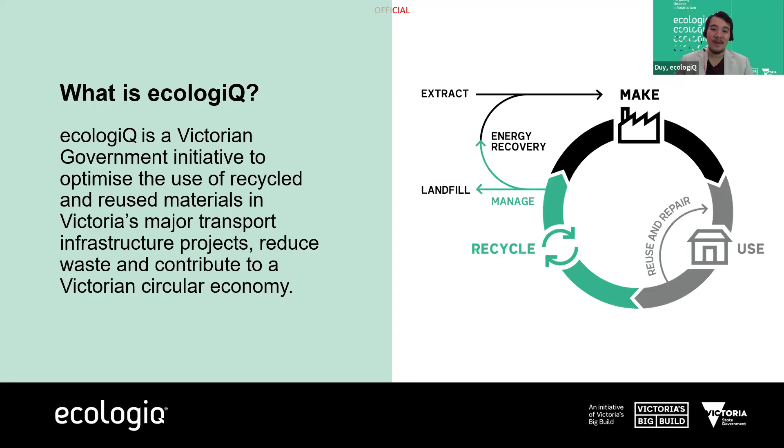So there's a way that we can recover those resources, keep them in operation, avoid using them in the first place. I think we know that that's the best way we can go forward in terms of some of the challenges we have ahead of us, from resource constraints right through to climate change and carbon. And you know what? We call it a circular economy, but I think our First Nations people just called it caring for country, and they've done so very well for so many thousands of years, that's why I always enjoy talking about this, as well as doing the acknowledgements to country.

But just a little recap, ecologiQ has been delivering the Recycled First policy, which means that a lot of our road, rail, and tunneling projects have had to look at the use of recycled materials wherever possible, then optimize in terms of: it needs to make sense, it needs to perform, it needs to be safe, and it needs to be available and economic. And secondly, they've been reporting on the quantity and volumes of those materials used to date on their projects.

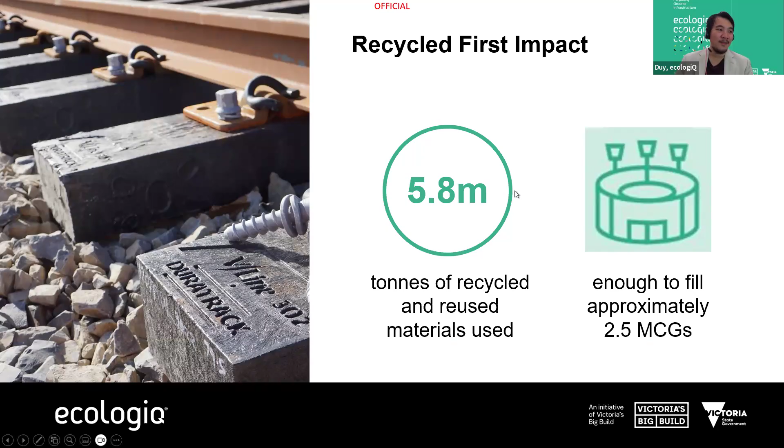So here in Victoria, I just got an update yesterday from our data team that we've now hit almost 6 million tonnes of recycled and reused materials on our road, rail, and tunnelling projects. And for the other Melbourne metric, it's enough to fill over 2.5 MCGs. So quite a bit of that material diverted from landfill.

Now, helping me to provide some advice and guidance to our presenters for today's showcase, we've assembled a couple of experts from industry, and that's who form our panel. I've had an apology from one of our panelists, but that's okay. We still have Nicholas Lee and Leanne Griffin here to help us. Leanne, I can see you there. Did you want to say hello to the audience and introduce yourself and what you do, and maybe any thoughts for today?

Yeah, sure. Hi, everyone. I'm very pleased to be here today. I am the circular economy lead for Arup in the Australasia region. And I've also been a long-standing team member and supporter of ecologiQ. I used to be with the program back when the Recycled First policy was first rolling out, and I've been involved on and off over the years as well. So really looking forward to hearing all of the great ideas today.

Thanks, Leanne. Nicholas, representing Department of Transport. Morning, all. So I'm manager materials assurance. The team looks after material registration schemes, mainly in the road space. So looking after the asphalt, concrete, crushed rock mix designs. The team also does accreditations for quarries. And as part of that, we also look at novel or different materials when they come out and make assessments on those. Fantastic. Thank you, Nicholas, and always great to have the Department of Transport's input.

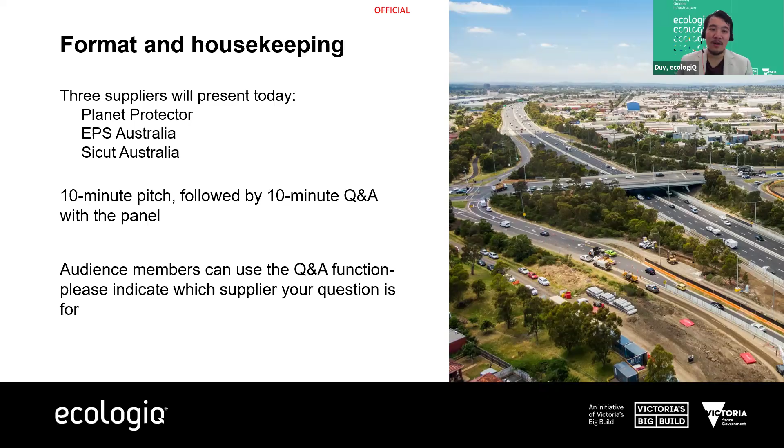So without further delay, Lars, the floor is yours. Please tell us about Planet Protector. Perfect. Thank you very much. Now, good morning, everyone. My name is Lars Ljung. I'm the Sustainability Manager here at Planet Protector, and I'm here to talk to you about one of our new products called JEANIUS.

Now, Planet Protector started off as a packaging company that basically harnessed the power of sheep's wool to make insulated packaging. That's why I have a sheep sitting behind me, because that's always been our mascot. That's always been our mission to make sustainable products using sheep wool. So we started off as a packaging company. We did very, very well, supplying mainly to the food and pharmaceutical industry, providing insulated packaging.

But of course, as we grew as a business, and as we grew in knowledge, we also wanted to expand into new sectors. Using the same knowledge about insulating a box, we figured that we might as well also be able to insulate buildings, acoustic insulation, in between partitions, and so on and so forth. And as such, our new product was born. So we're moving a little bit away from wool, into a new product that has been aptly named JEANIUS. Can we go to the next slide, please?

I do want to, of course, do a bit of an acknowledgement of country. Now, I am sitting in Gadigal land of the Eora Nation, but one of our big facilities is amongst the Bunurong people of the Kulin Nation, down there in Melbourne. So I want to acknowledge both lands because we benefit from both parts of Australia. Next slide, please.

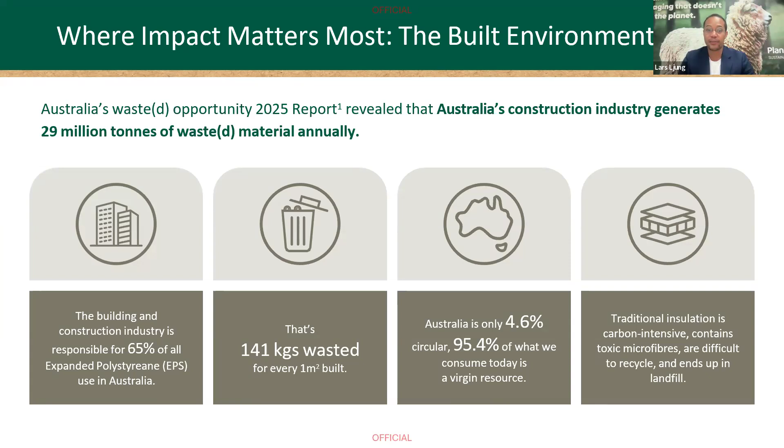Introducing our bit of a solution. Last year, we completed the construction of a $15 million state-of-the-art fiber processing facility. What this allows us to do is take a variety of different fibers, upcycle them, and create different products such as building insulation, acoustic insulation, and of course, packaging for the other side of the business. In addition to that, we also do a lot of geotextiles and bedding, which speaks to the capability and the breadth of what our machine can do.

We have aptly named the machine our Oompa Loompa from Charlie and the Chocolate Factory, because as you can see, there's a huge connection of piping systems going through the entire facility. But basically what we have built in Australia is the Southern Hemisphere's most advanced fiber processing facility. And like I said before, it allows us to take a variety of fibers and make them into insulation that can be used for building, for acoustic paneling, soffits, and so on and so forth.

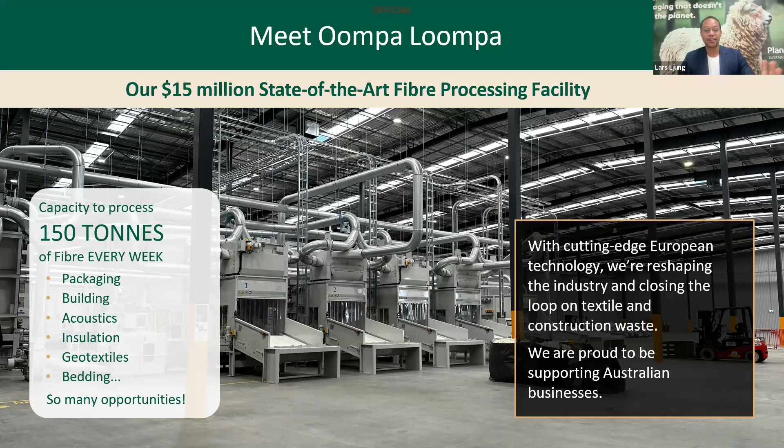And we're very, very proud to have been able to bring this technology back into Australia, supporting local businesses in many, many different ways. So can we please go to the next slide, please? And introducing, of course, our new product. And as the name would probably signify, Jean is for genius.

So we've, of course, taken recycled cotton. We have been able to upcycle it using our machine and create a new insulation product that's the first of its kind in Australia, made again from 100% recycled denim jeans. This has been done in Europe quite extensively, especially in Germany and France, but this hasn't been brought down here. So basically what we had to do over the last year and a half is, of course, set up the machinery, which took a lot of time.

In addition to that, of course, we had to get all the compliance, which we have done. Of course, we have Group 1 fire rating. We've done our noise reduction coefficient ratings as well. And of course, R values, where we hit anything from R value 2 all the way to R value 6. So basically spanning all the different types of buildings that we need.

In addition to that, it is a non-toxic alternative to what we already have on the market because it doesn't have any VOCs. But more importantly, you can handle it without any issues because, at the end of the day, this is only a recycled denim or cotton. So installing it, you don't need any special PPE or equipment. And as you can see from the image on the side there, it installs very, very easily without any sort of issues. But more importantly, we can also speak about the sustainability of it.

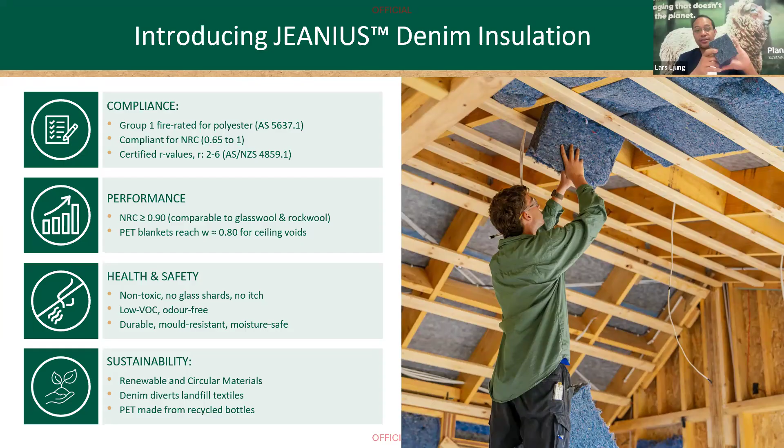Because we're using a resource that would basically be ending up in landfill, we are saving a lot of carbon emissions from being wasted, but also we are diverting this particular waste away from the landfill and using it in our product. Now, I do want to preface by saying we do have a small percentage of recycled PET, which we use as a binder, but only about 5 to 10%. The rest of it is just cotton or denim jeans. Can we please go to the next slide?

In addition to that, denim has one of the best noise reduction coefficients that we have on the market. From our testing, we understand that our product is probably the highest with an NRC rating of 1 at 90 millimeters thick. This is why denim is used extensively in the automotive industry, such as in your Mercedes-Benz and your Volkswagen, as the acoustic insulator to reduce road noise.

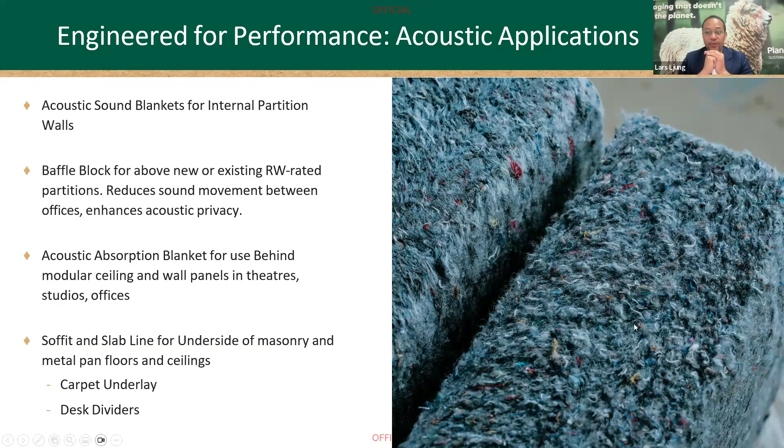As such, we want to harness this particular technology, and we are basically making products that are incredible acoustic insulators that can be used as partitions in offices, as baffle blocks, as soffit liners underneath parking lots and driveways as such. But again, it's just harnessing that particular technology that reduces the noise so much more efficiently than anything else in the market to create a new product that we haven't really seen before. So we could go to the next one, please.

The main benefits, of course, to any of the businesses that will be working here is that we'll be heading towards more of a net zero aligned product by using our denim insulation. We have a completely ethical and transparent supply chain that we're always happy to share. And we're also in the process of doing a complete LCA so we can realize how low our carbon footprint is when you compare it to your fiberglass insulation or your mineral wool.

In addition to that, our manufacturing facility is in Altona North, so it's 100% onshore, which reduces lead times, but also gives us a lot better opportunity for product research and development with any of our partners. In addition to that, we have incredibly competitive pricing, and that is based on the fact that we have a highly automated line that basically produces a large amount with very little labor. As such, we know that we're very competitive even with imported products that people might see as a more cost competitive option to us.

In addition, we are ISO certified, and of course, we are a woman-owned business and B Corp certified too. Next slide, please. What we foresee basically in the future is that much more of the infrastructure is going to be demanding low carbon and circular solutions.

Australia-made policies are also going to be on the forefront of a lot of decision making, while circular economy initiatives and local manufacturing will be something that we're going to see a lot more of. As such, we're very, very proud of what we've built here with local manufacturing using circular products that puts the health of ourselves and our buildings first.

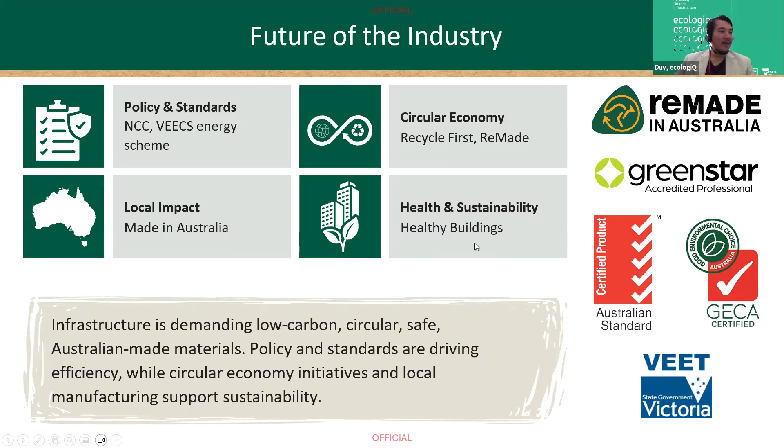And for our next presenter, something a little bit different, Dean from EPS Australia. Dean, I hope you're not dialing from the Lady Gaga concert or the Grand Prix? Yeah, it's all happening at the moment for us.

Hi all, my name's Dean Andreula, Managing Director of EPS Australia New Zealand. Just a little bit about our company. We're a leading infrastructure supplier for ground protection, seating and stage barrier crowd control around the world. We're based out of 14 countries. And we're just looking at our footprint and looking at how we can make the world a better place with going green.

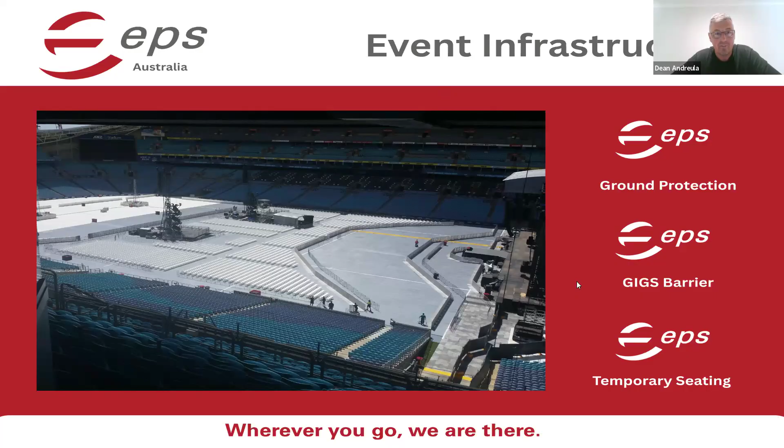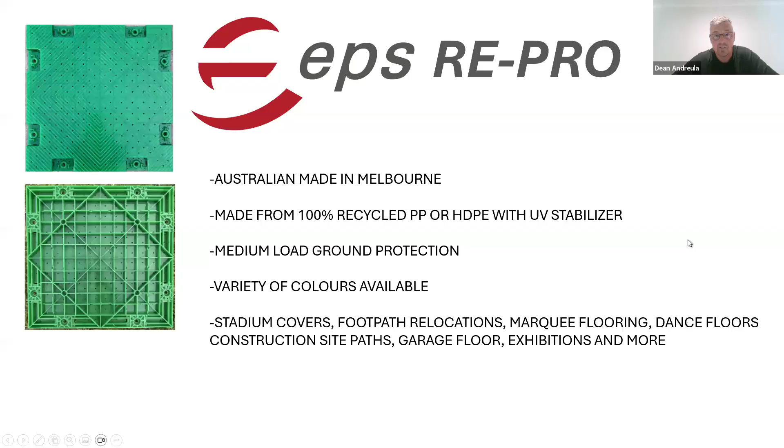So we'll go to the next slide, and we've decided to start looking at fully recycled flooring options for the event industry. So this is our new product, EPS Repro, rebranded from our EPS Pro line. We've moved manufacturing out of Italy to Australia in the last 6 months, and we're slowly starting to produce a fully recyclable product here in Australia, made from HDPE or PP with UV stabilizer, medium load ground protection, comes in a variety of colours, used in stadium covers, footpaths, marquees, dance floors throughout major events and music concerts around the world.

Next slide, please. Advantages of our product: it's the fastest system on the market, 2,000 square meters laid with a crew of 16, so quite fast compared to any other product in the market. No cam locks or anything with our patented clip system. Transporting more than 40% more stock on a semi-trailer compared to any other product on the market, so we're saving that way as well. It can stay down for extended times without killing the grass, without turf replacement, which is a big plus these days with the cost of turf replacement in our major stadiums, looking at around $150 a square metre to replace turf. So everyone's looking at a different option.

That's just a few little numbers on our product. We'll get 102 square metres a pallet compared to every other product in the market, which runs about 50 to 60 square metres a pallet, getting 2,000 square metres on a semi-trailer compared to other products doing about 1,000 or 1,100, so halving our transport costs as well.

Next slide, please. Just a few more stats. A full stadium coverage would roughly have about 16,000 square metres of pedestrian coverage, product put down, which is 6,274 sheets. The weight of this is about 105,000 kilos, and going into the recycled product, we're saving on average around 588 cubic meters of waste going to landfill on one stadium coverage.

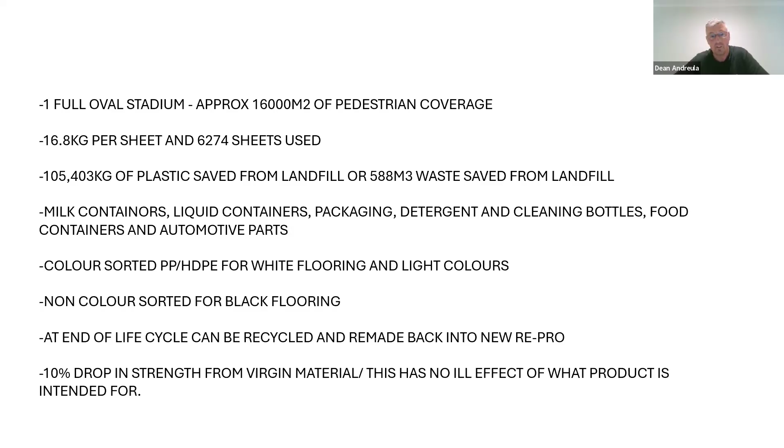Next slide, please. We've already conducted turf testing on the product with Labosport, who are a major tester for all the major sporting events around the world, for every pitch, for FIFA, every World Cup, Rugby World Cup and stuff like that. So we got those guys in to run the testing up at Darwin Stadium, testing results against virgin material to see the difference, because we have to prove that the product is as good as the virgin material to get it into these major stadiums and big sporting events. Otherwise they won't use it.

Next slide, please. These are just a couple of slides. What you'll see on the left is the virgin material after day 4 and day 11, and the new 100% recycled material on the right from day 4 to day 11. So we're seeing some very, very good results on this. And we're thinking that stadiums and major sporting events will see this and want to do their part in the future.

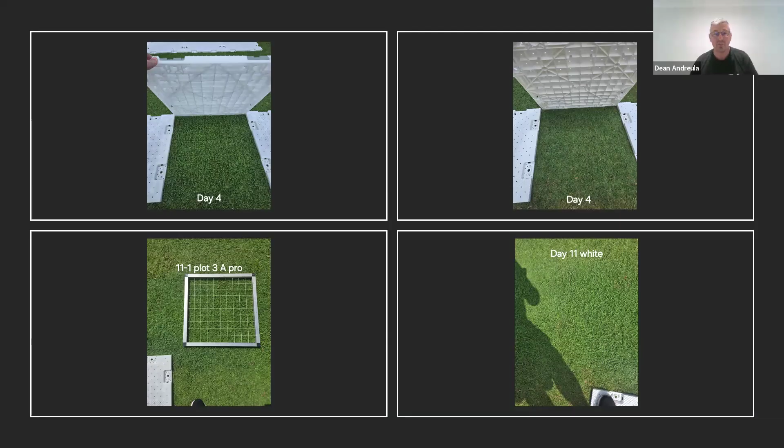Next slide, please. What is next for EPS? At the moment, we're about to start conducting CO2 emission testing to look at how our work is helping the industry and looking at the bigger picture. No more manufacturing in Italy. We've moved manufacturing into Australia, so we're manufacturing now out of Preston, Melbourne. Getting the word out to the festivals, promoters, stadiums in our industry to show there is a better solution. That's our next big thing.

And while EPS is world leaders in event infrastructure, we need to be more proactive in building, government, rail. We also see this product being big in these sectors, and we're talking to our major sporting competitions and stadiums. This is what we're doing. In Australia alone, we probably look at needing three full stadium coverages, which is 48,000 square meters of coverage, taking a lot of product out of landfill, and another 15 to 20,000 square meters of coloured products for festivals.

How big the building and government sectors are is yet to be explored. That's our next thing to look into, and expansion into Bunnings and things like that, for people buying products for smaller marquees, garage covers, covering their floors in the garages. So the more we can manufacture, the more we can get out of landfill, the better.

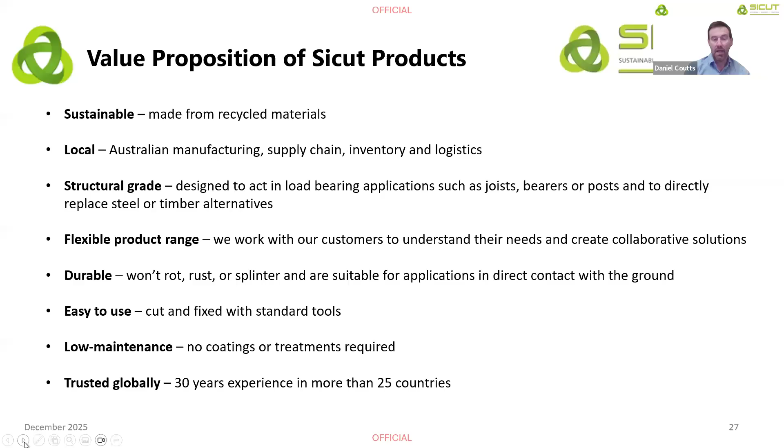So again, it's very much the circular economy that Victoria is promoting, and all these initiatives we believe we're very much aligned with. Like I mentioned, the feed material that we source is typically post-consumer. We're sourcing that from a range of recycling and collection facilities, locally, and then we are manufacturing locally. And at the end of life, our product is recyclable. Overseas, we have established take-back schemes, and we'd apply something similar in Australia. So the opportunity is to support, from the beginning to the end of the asset or project life, a genuinely recyclable, sustainable product.

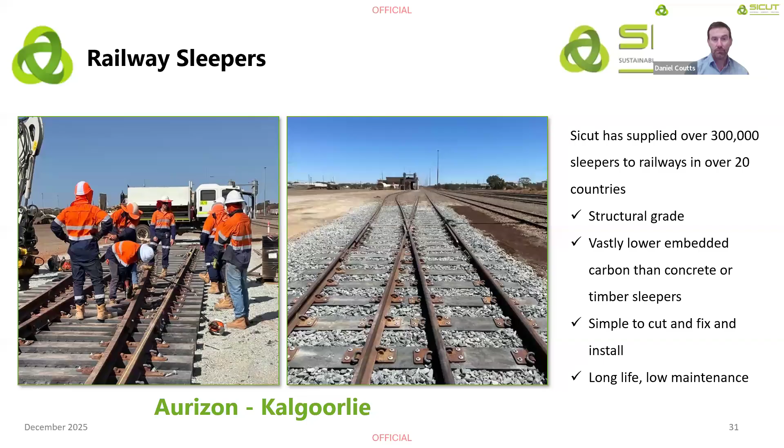Next slide, please. Okay, the potential for use of our products in street furniture, in urban design, in landscaping is a huge opportunity, and we have the flexibility to produce our products in a range of section sizes and lengths that could suit the diverse range of opportunities here. And we can see in the work ecologiQ has already done that there's a whole lot of opportunities for uses in street furniture and potential urban design, which we very much are ready to support.

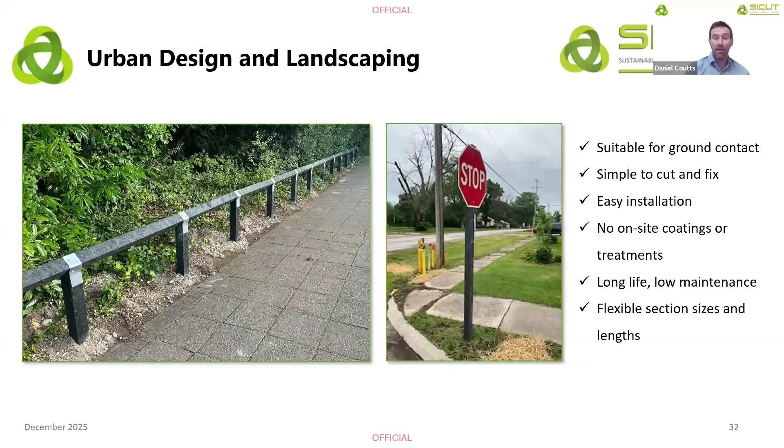The products come from the factory ready to install without on-site coatings or treatments. As I said before, they're cut and fixed by tradespeople, very similar to the other materials they might be using, but they come with the benefits of the quicker install without the need for additional on-site protections, and then the very long life and low maintenance.

Next slide, please. So bridges is a great possible application for our products. We can essentially supply everything that constitutes a bridge, whether it's the posts, the bearers, the joists, the bridge deck itself, or the hand railings or the edge protections, all of those products we can supply. And there's the possibility to undertake the assembly in an offsite facility and bring in a completed item, or to construct in situ.

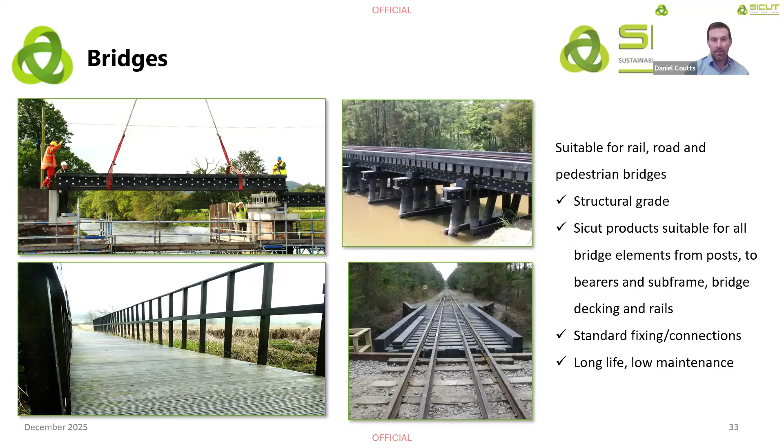Next slide, please. Okay, boardwalks and decking. Again, this is a very suitable application for our products. We can supply everything that goes in to make a boardwalk or a deck for a public space, for a park, for a council area, which is often not the case with alternative composite plastic products. This can be the posts, the joists and the bearers, and it can be in contact with the ground. It can be low to the ground, so very much high moisture content underneath,

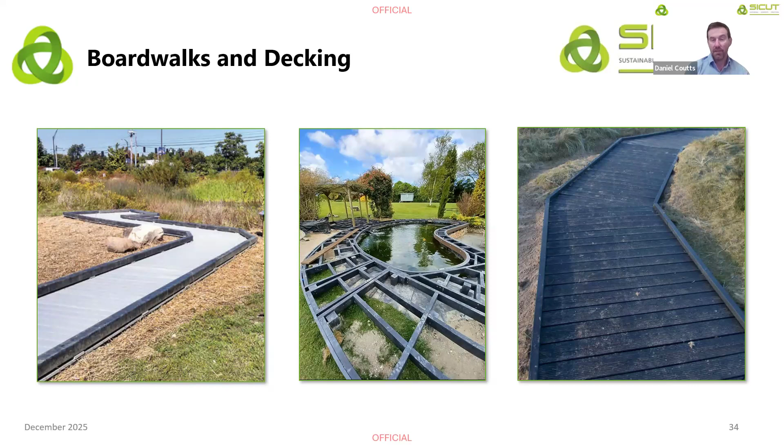and it can be around ponds, pools, etc. And this can deliver for the asset owner or for the facility a genuine, completely recycled and completely long life structure, from everything the public sees as they walk on the boardwalk to everything they don't see underneath, which often now is a conventional legacy type product because there just has been a limited availability of structural grade recycled plastic up until now. And the list goes on.

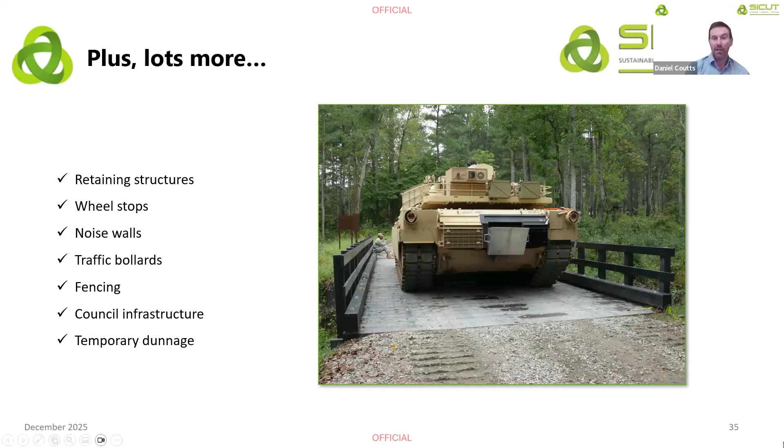Retaining structures, I haven't touched on those in this, but there's a huge potential for our products owing to the exposure and the structural requirements to be applied to earth retaining walls, wheel stops, noise walls, traffic bollards, the whole range of council infrastructure as well, fencing. And the photo here, I think it's a few decades ago, the US Army Engineering Corps did a research and development project using the products, and the demonstration at the end was to drive their tank over it, which makes a nice photo.

So thank you very much. Myself, Daniel Coutts, and Thomas Staley, we're very available. We'd love to. We typically find that we can best get involved early in a process for an asset owner or an engineer or a consultant advisor or a contractor when they're considering material selection early.